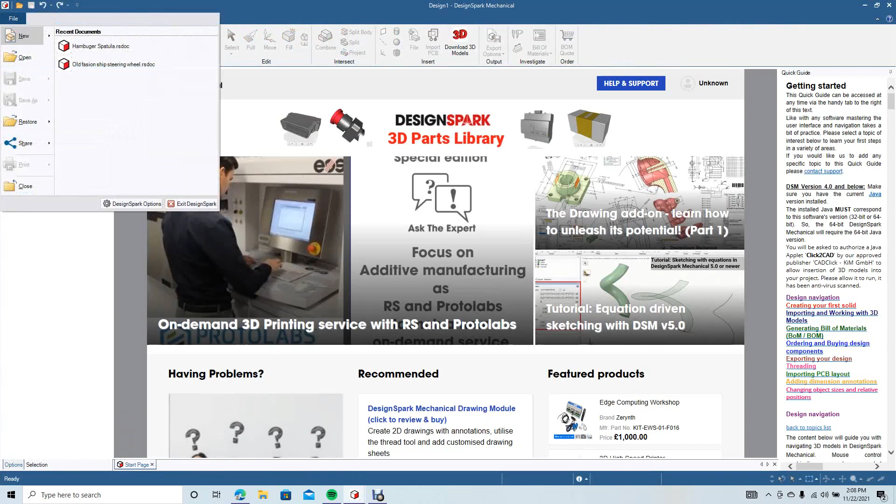First of all, we want to go ahead and launch the program. When it opens up, we want to go to File, New, Create New Design.

Go ahead and change the view with this eye icon here to Plan View. Go ahead and minimize. I have a drawing that I got off the internet, so I'm going to use that as a reference.

We're going to add that right to the center there. I know this piece is approximately 4 inches high, so we're going to use this size. If somebody wants it smaller, they can always create it at this size and then reduce it down.

Since we're going to be revolving this piece, we only have to draw half of it. So I'm going to start off with a center line. We'll turn on Snap to Grid, and then draw a line straight down the bottom.

Go ahead and select off of it. So now I just have to draw half of this shape. We're going to start with the line tool here, put our base in there, select off of it, and then use the square tool.

I'm going to switch to the 3-point arc. We're going to go from right there up to there, and then go ahead and round this.

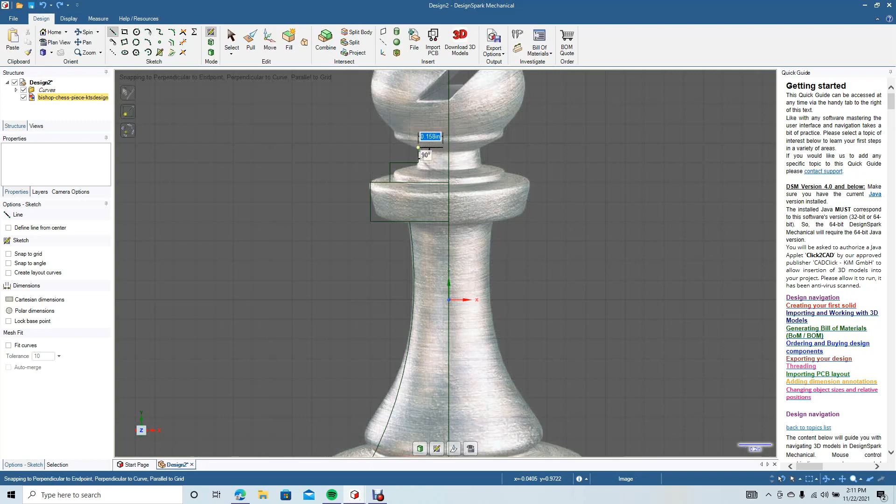Okay, so now Control minus to zoom back out. Now we want to draw this bishop head shape.

Go ahead and start with a circle there. That's good. And now we're going to use a tool called the spline tool. This is really great for doing irregular shapes, especially if you have to trace something — this is a good tool to use.

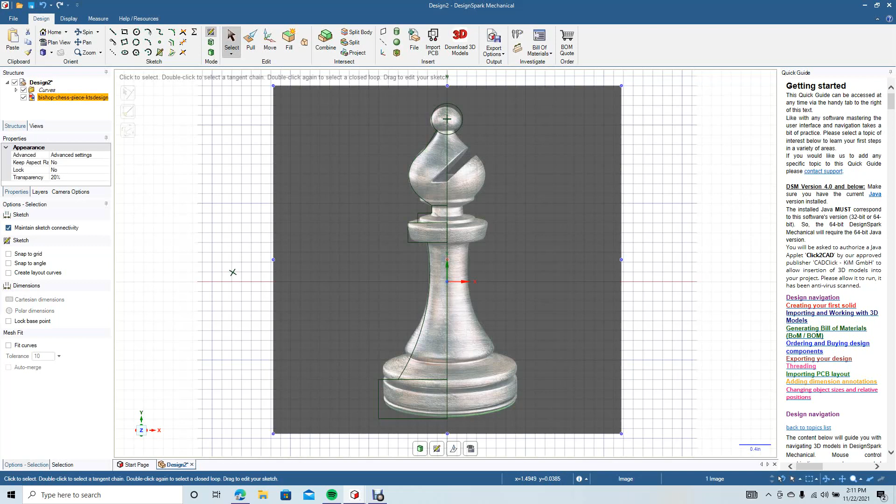Okay, so it looks like we have the basic shape. So instead of getting rid of it, we're going to select the move tool, and then move it over to the right.

Okay, so now we're going to go trim away, and we're going to trim away the stuff that we don't need. Don't need that. Don't need that right there.

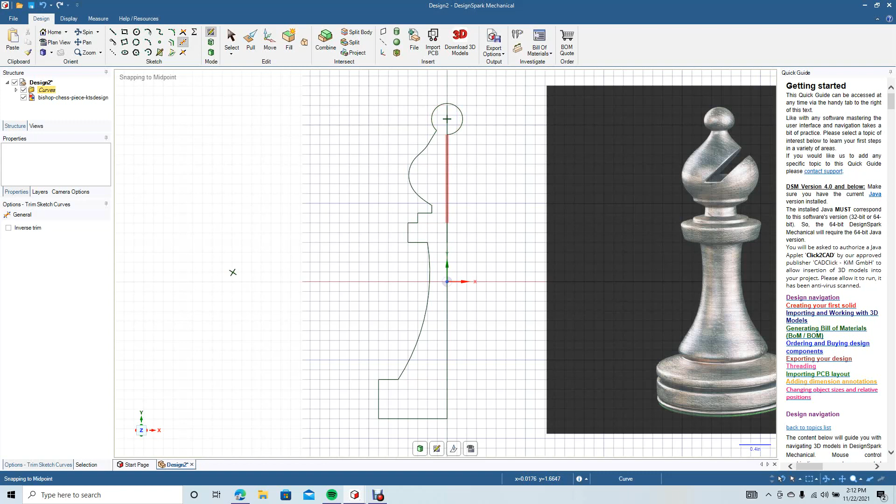Then I usually like to add a new line to everything before I revolve it. So we'll start up there, go down to there, click the select button, grab our trim away tool, and get rid of this.

Now I want to put some radiuses in here, so we'll get the circle tool, select off of it, go ahead and use the trim away tool, and trim away that. We're going to put a radius right there at the bottom of that.

So we'll grab our create rounded corner tool and go ahead and select to click off of it. I think I might want to add a rounded corner there too as well, so we'll get our circle.

To there, select to click off, grab our trim away tool, and then we'll put a little slight radius right in here. So we'll go ahead and get our radius corners. Right there. Go back to the trim away tool. Get rid of that, don't need it. And then maybe one more radius up here.

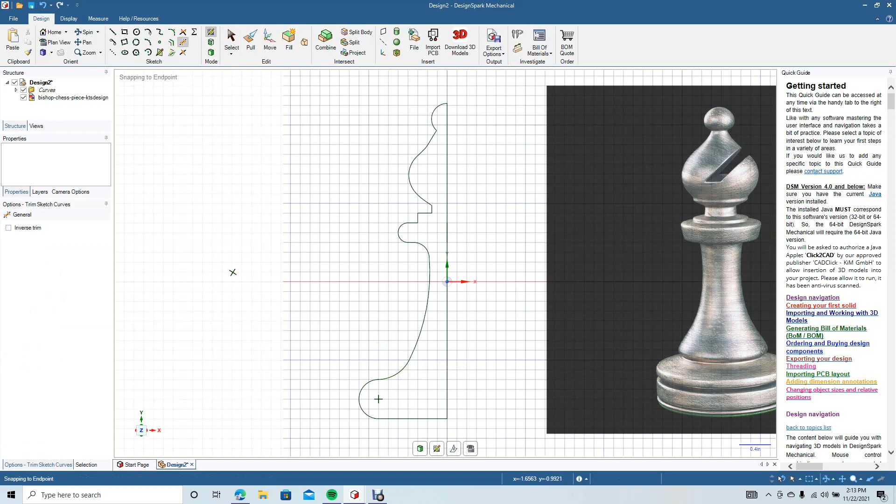So I'm gonna go Control plus to zoom in. Go ahead and grab our radius tool. And we'll go like that. Okay, that's not looking too bad. So Control minus. Now we're gonna go ahead and use our pull tool. We're gonna select all of this.

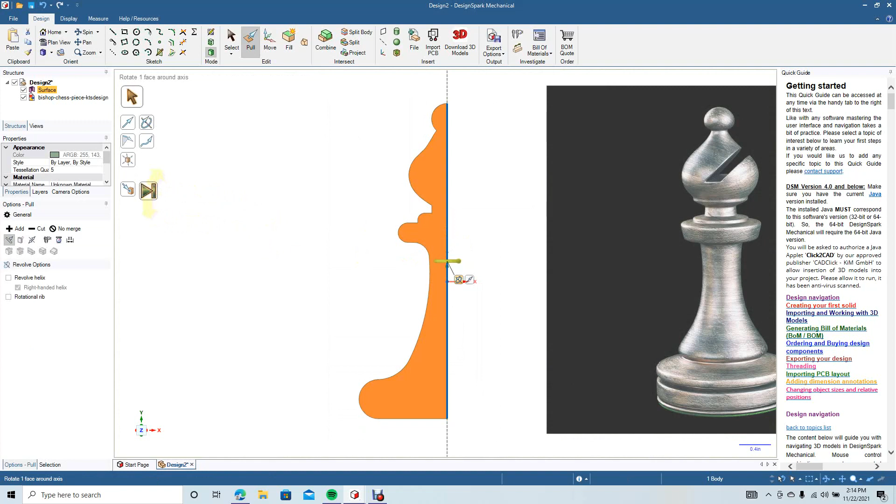And we're gonna go revolve. We're gonna select this point here. And then we're gonna end it with a full pull. All right, so there's our bishop. So now we want to go ahead and put this cutout right in here. So go ahead and click on that piece there.

And now we're going to go ahead and create a part from the center there. Straight up. Okay, and then select to click off of it. Now we're going to use our offset tool, offset curve. We want to offset that. Let's go 0.129. Okay, now we'll do one on the down part, 0.129.

Okay, now I'm going to go ahead and grab the line tool, click there, put a line across to here. It doesn't matter what length it is. To close these two, we're going to go ahead and create corner tool. That looks good there. Go ahead and hit the select tool. We'll get rid of this one. Don't need it. Go ahead and get the line tool. Close up this line here.

This particular piece I want to move up a little bit because it's down a little too far. So we'll go ahead and click, hold down the Control key. Get all those pieces. Go to move. Go and grab the green arrow. We're going to pull up a little bit. Maybe right about 0.120. So we're going to go ahead and hit select.

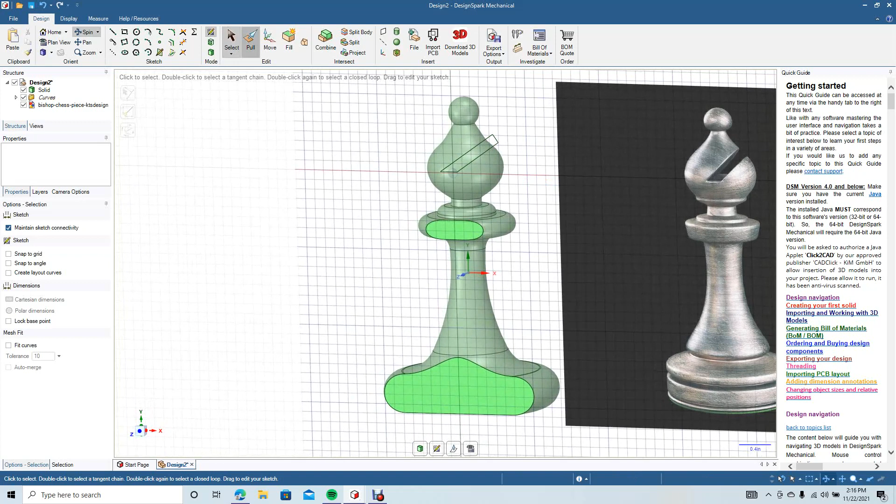Now we're going to go ahead and spin this bishop ever so slightly so we can see what the cut's going to do. Go ahead and get pull. Click on that and go ahead and pull straight through. Hit the select button. Go ahead and grab our spin. And there we go. There's our bishop.

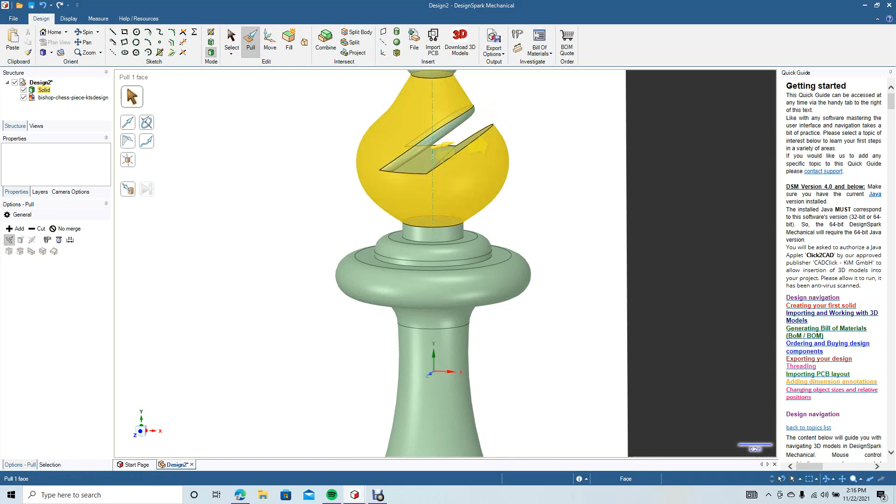I'm going to do one last thing. I'm going to go Control plus. I'm going to use our pan tool to pan down. I'm going to put a little radiuses in here. So maybe like 0.04 for the top. 0.04 for the bottom. And hold the Control and click all these. Go ahead and add a radius there. 0.04. Hit the select button.

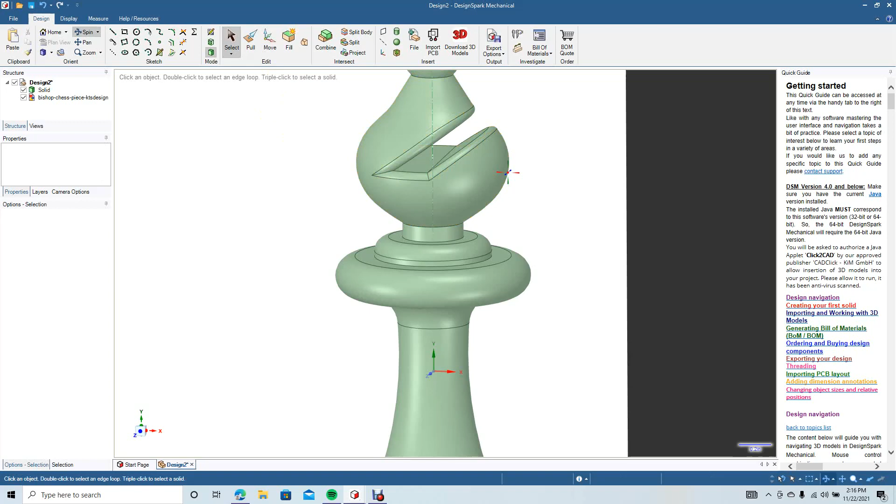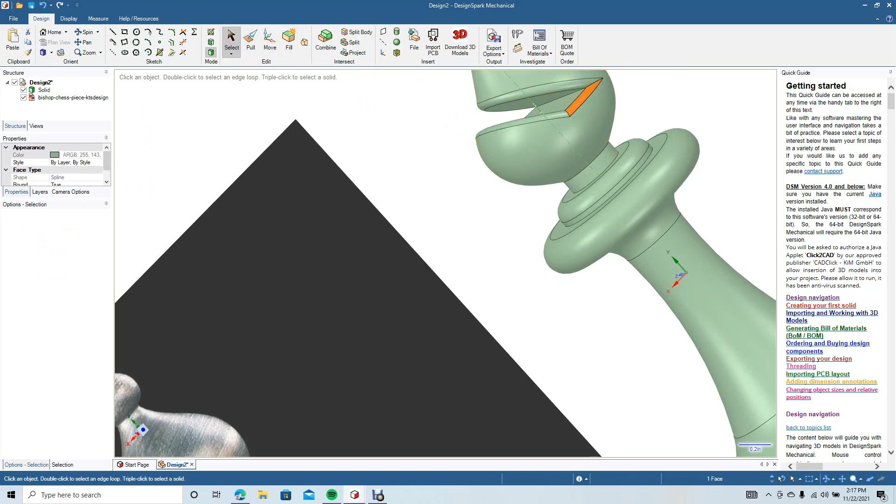Now we're going to spin around to the other side and do the same on here. So we'll go ahead and hit pull. Click, hold down the Control key to get all those three lines. I didn't want that part. Click, Control, Control, 0.04. Hit the select button. Now we're going to go to the display view, go to top. All right, there's our basic bishop shape.

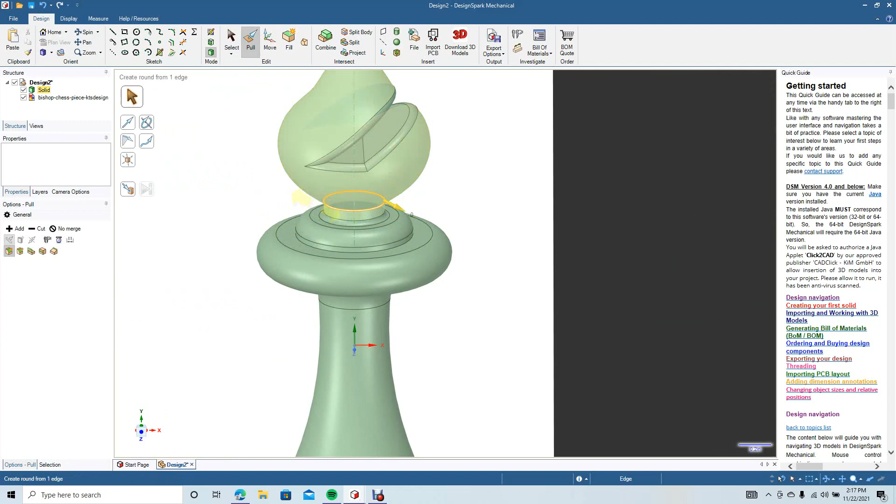I might want to add two more fillets to here, so I'm going to go Control plus. We're going to use pan to pan over. We're going to spin, go to pull, we'll add a small fillet there. And we'll add a small fillet there. Use our spin tool to make sure we like it. That looks pretty good. Control minus to zoom out. Then we're going to go to top view.

And now I'll probably put one more radius in there. So we'll go ahead and pull. Okay, hit the select button. All right, there you go. There's your basic bishop chess piece. Hopefully you like this tutorial.